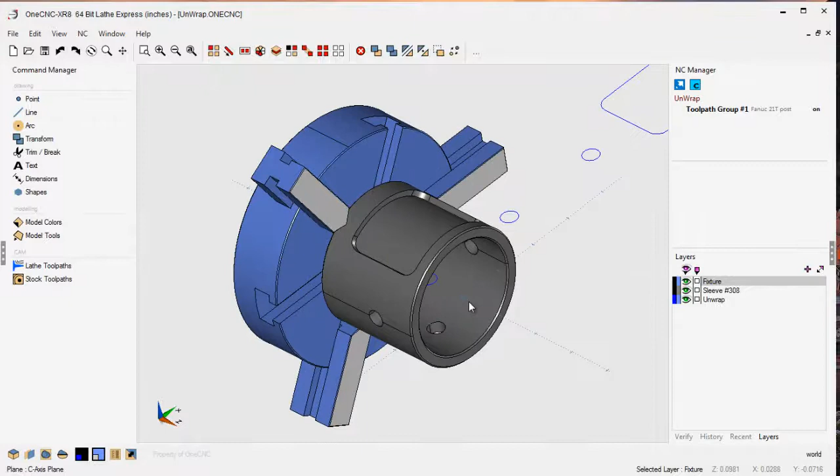Hello, this is Patrick at OneCNC West, and what we're going to do in this video is apply toolpath to the unwrapped geometry we manually created in our last video.

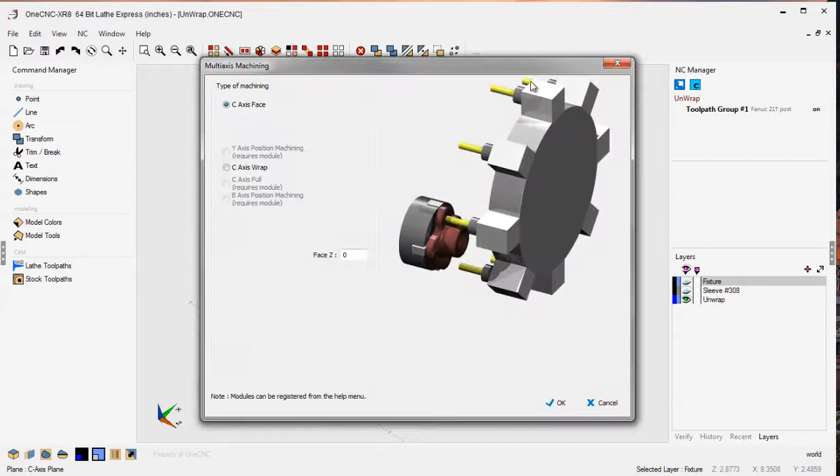Alright, so to begin with, let's tell OneCNC that we'd like to perform some C-axis wrap machining. To do that, we'll take our cursor, head up to the NC Manager, left click here on the Set Machining Axis, and we're going to click on C-axis wrap. Don't forget to put in the proper diameter of the part, which is 3 inches, and then for material length I have minus 2.5 inches. So we'll click OK to that.

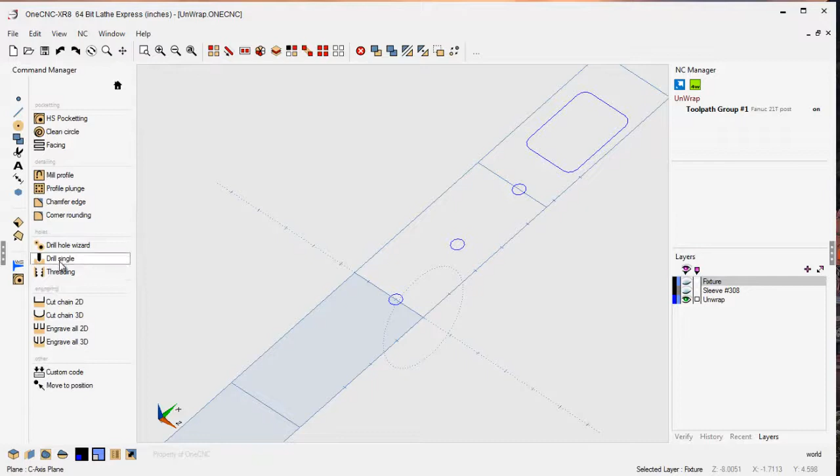Very good. Now let's start to apply our toolpath. We'll head over to the Command Manager. We're going to go into our stock toolpaths, and let's drill the holes first. We're going to use drill single. I'll use arc center as my selection type, and I'm just going to left-hand mouse click the arc center of all 3 of those circles and then right-hand mouse click. We'll select finish, and now we're going to specify our tool parameters.

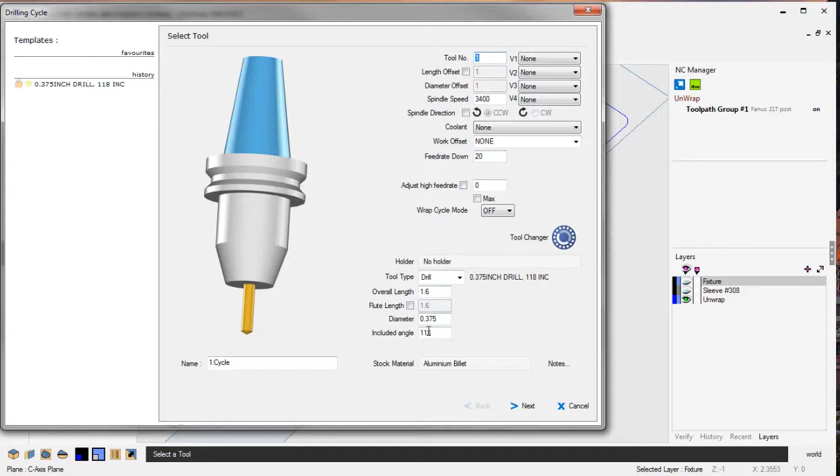This tool is going to be in turret position number 1. I already have our RPM and our feed rate set. All this looks great. The diameter of the drill is 375 thousandths. I'll click next on that. Our clearances look good. Rapid plane at 200 thousandths. The final depth of each hole is going to be minus a ½ inch.

I'm going to use a canned cycle. So we have machine cycles. We'll click next, and I'll use a G81. All that looks very good, so let's click Finished on that. And there we go. There's our first machining operation. Notice how the machining operation has this extra icon over here, the W that stands for wrap machining, and then over here we have X-axis.

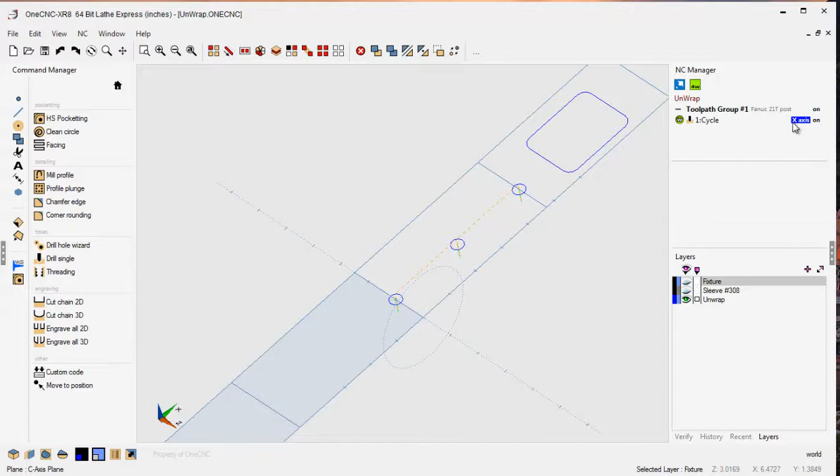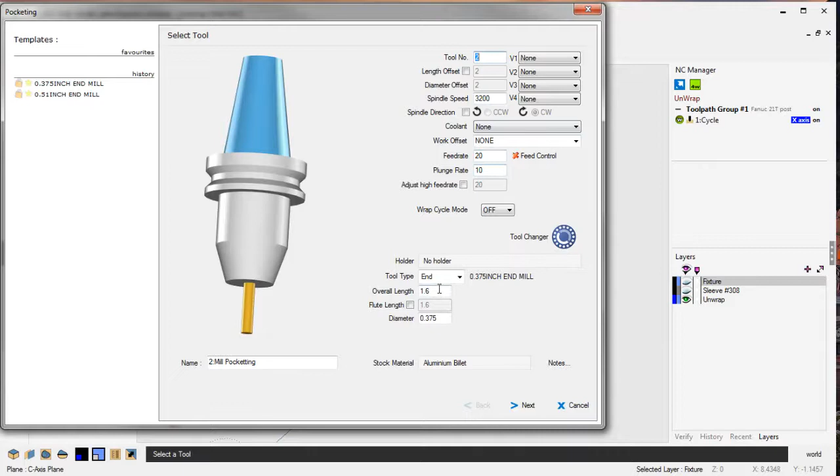Very, very good. All right, now let's machine the pocket. So back over to the Command Manager, we'll go into high-speed pocket. Going to left-click on that pocket, right-hand mouse click, and just like with our previous machining operation, we're going to define the tool. In this case, the tool is going to be in turret position number 2. RPM, feed rates look great. This is going to be an end mill with a diameter of 375 thousandths. That looks good. Now our final Z depth only needs to be minus 125 thousandths on there. That looks good, so we'll click next.

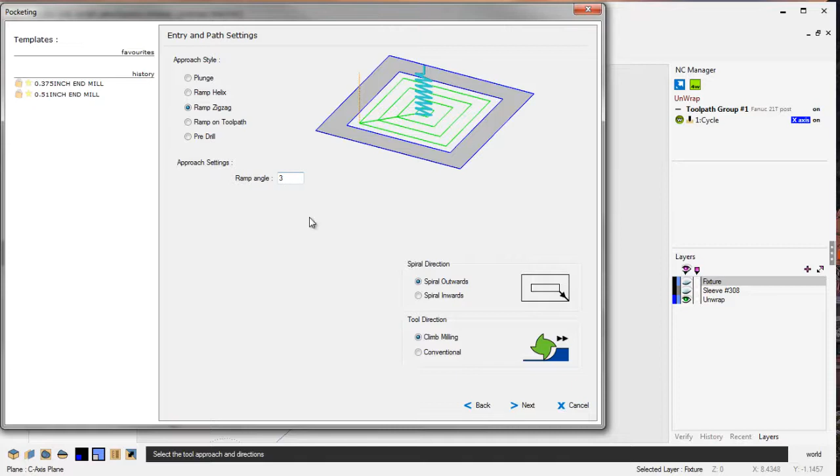I'm going to use a traditional style pocket operation. We'll click next. I'm going to ramp zigzag in, and the angle of the ramp is going to be 3 degrees. We're going to spiral outwards, climb cut, next. Step over 75% of the tool diameter. All this looks great, so we'll click next on that. I don't need an extra finish pass, so we'll click finish. And there we go. There's the tool path.

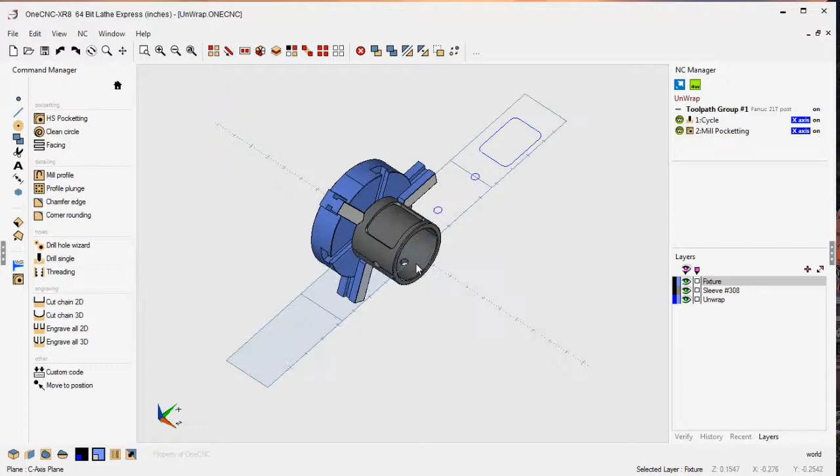Now let's take a look at our tool path matched up against our solid model. So I'm going to turn the fixture and the actual part back on. And then let's preview our tool paths. Head up to the NC Manager, right-hand mouse click on the toolpath group, and select Preview Toolpaths. I'm going to rotate this around just a little bit. All right, so here's our first drilling operation. Going to speed up the preview just a little bit.

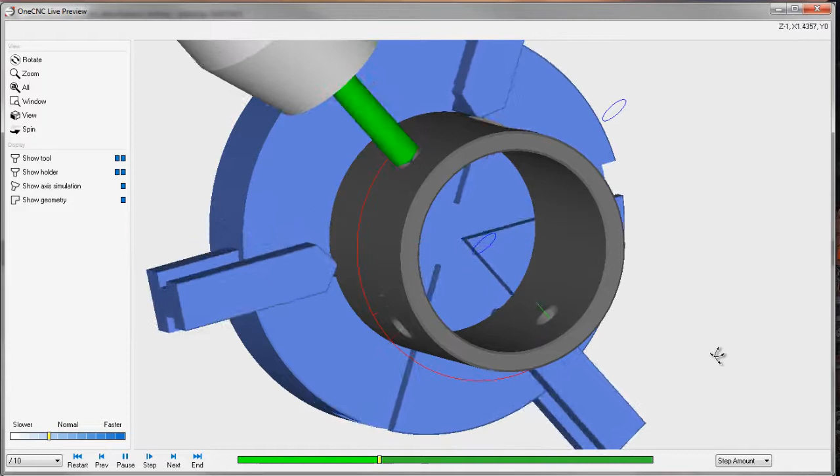There's the rotation. We have a great clearance, 200 thousandths. Now we're going to drill the second hole. Very good. Now we're rotating to the third and final hole. That looks good. Now we're going to change tools to a 3/8 diameter end mill. We're ramping into the pocket. Let's zoom in on this just a little bit. Very good, and here's our trochoidal style. I'm going to make our tool holder translucent so we can see that a little bit better.

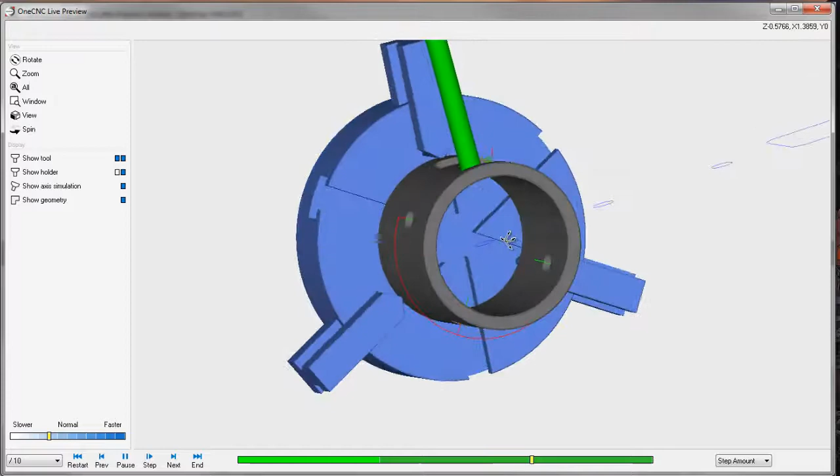Very, very nice. So you have control over the simulation in the preview just by using the slider down here. Left will slow down the simulation, and moving it to the right will speed it up. Alright, that's it for applying toolpath to unwrapped geometry using OneCNC Lathe Express.